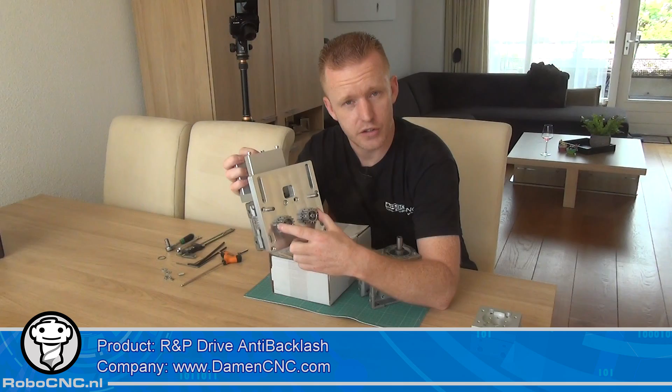To do this, we're going to use a product from Damen CNC. This is the product altogether. Basically, we have two pinions, used to get all the backlash out of the rack and pinion system. We have a worm gear with a 1:10 reduction ratio. This is needed because the rotational speed of a stepper motor is quite high, so we need to reduce it to get a smooth, normal speed on the CNC machine. And of course, on top we can mount our stepper motor.

I want to show you this unit. We're going to build one right now, and afterwards we're going to test it, of course. I think the testing won't be in this video, but this is an assembly video. Hope you guys like it.

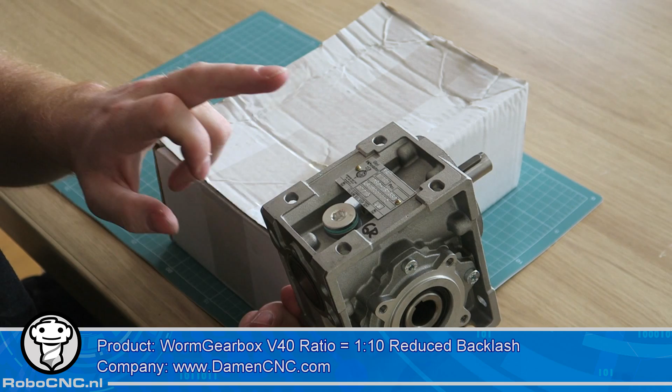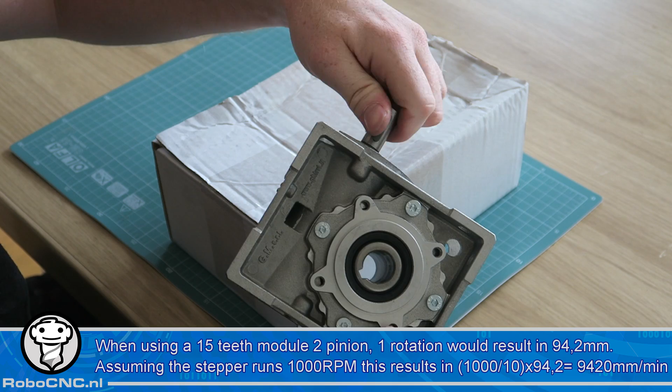Let's dive into it. In the package, first of all, we have the worm gear. You can choose which type you want; I've chosen the standard 1:10 ratio. Basically it's a 90-degree bend with a worm gear inside, and it's anti-backlash, so it should have really low backlash on the worm gear.

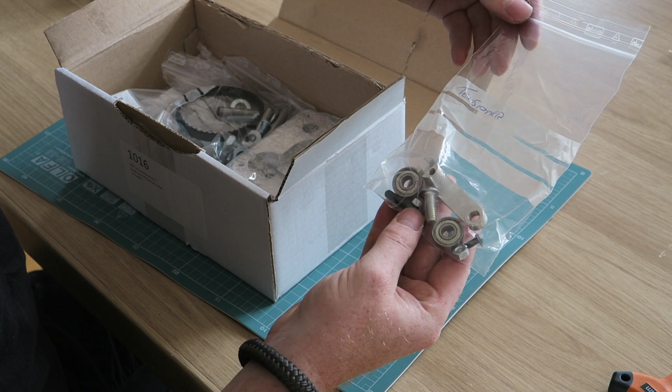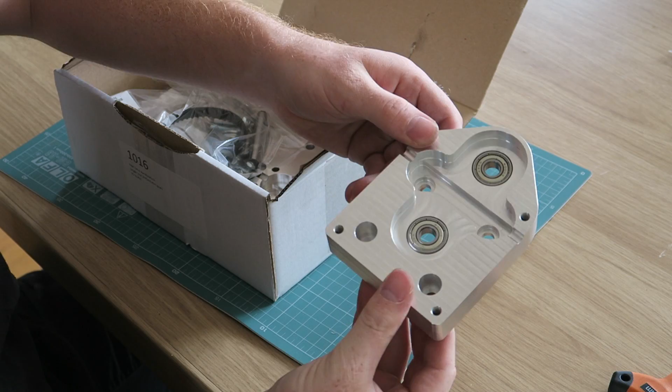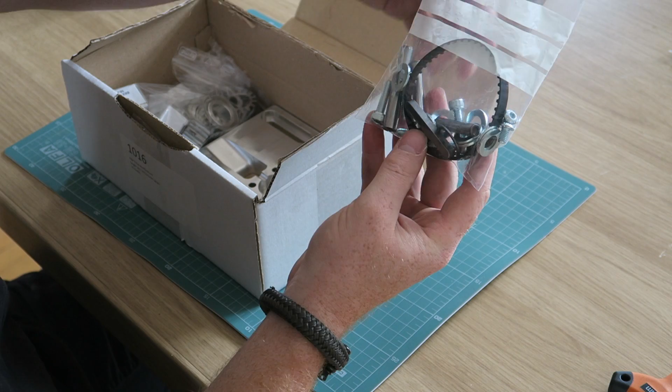Well, let's open up the package. We have a sensor inside, some paperwork, a nice set of bolts, a tensioner, or all the parts needed for the belt tensioner, some beautifully machined parts with the bearings already in there, a belt, some washers and straight pins, a shaft, and all kinds of goodies.

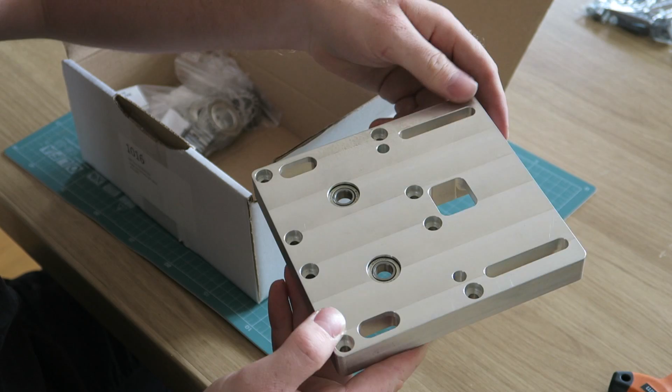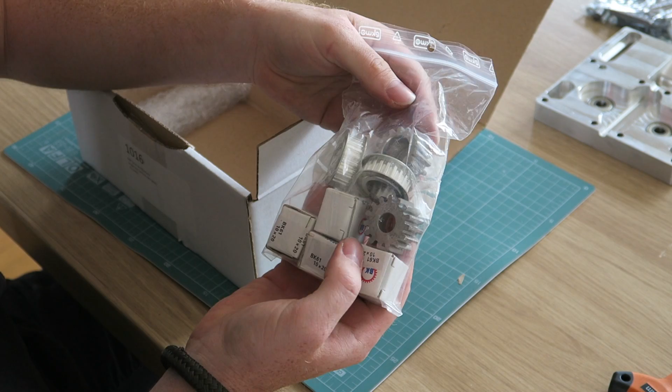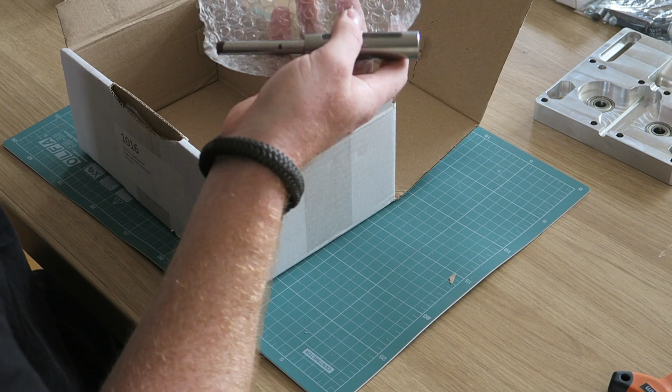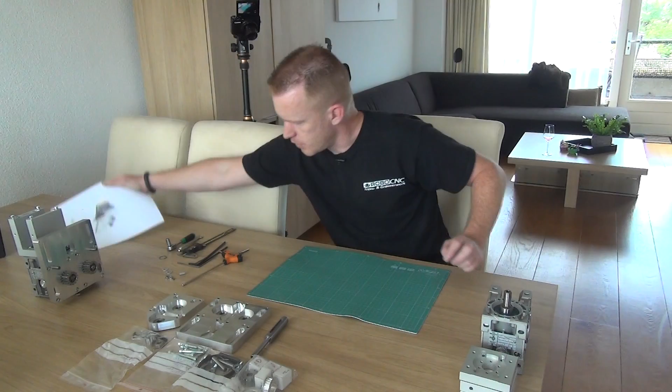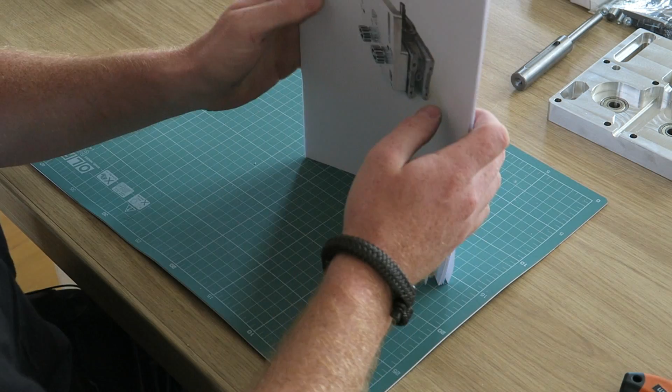So on the Damen CNC website, there's a manual for assembly of this unit, but you of course have this video, so maybe you don't need it. First of all, let's find step 1: an introduction and the tools required.

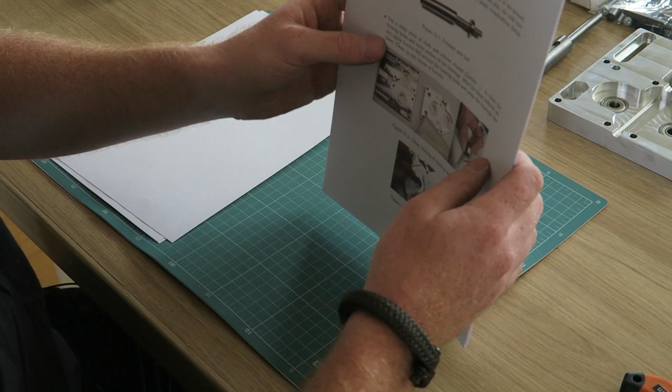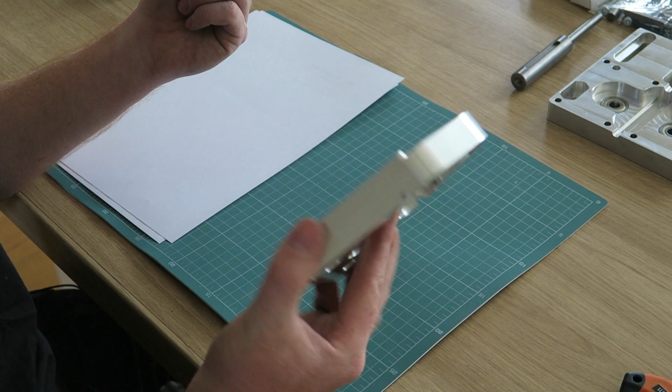Some Allen keys, wrenches, etc. There's an instruction for the bearings, to place them and glue them in place with Loctite, but it seems the unit already comes with the bearings in place, so we don't need that one.

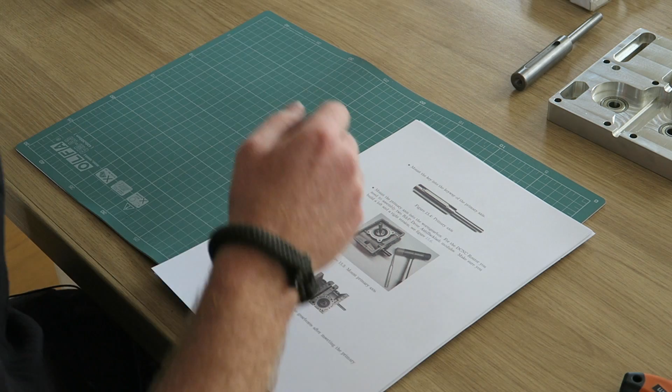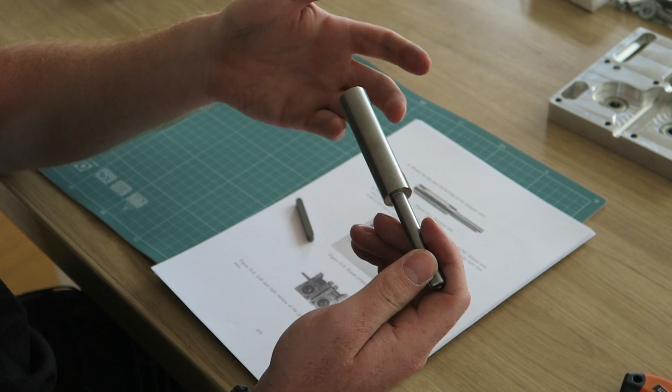Next step: mounting the key in the primary axis. I've taken this down to the workshop and used some Scotch-Brite and WD-40 to clean it up. If you have flash rust on it, it's easy to get off, and if you don't have flash rust, you also need to go to the workshop because you need to get the grease off. Anyway, make sure it's clean and put the key in there.

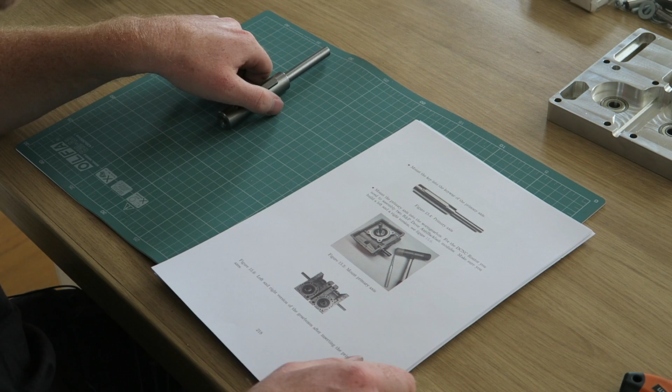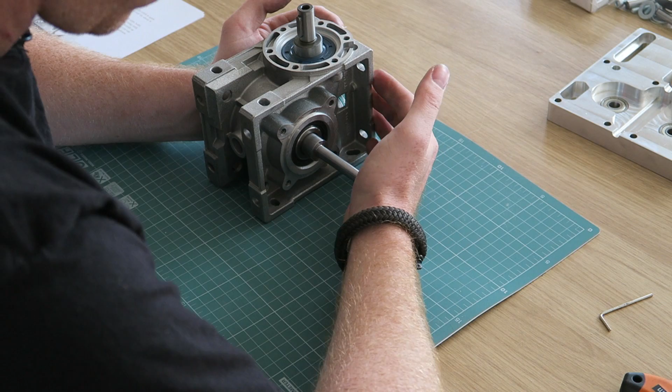So now we have the key inside of the shaft. We're going to place the shaft inside the worm gear, making sure we use a left unit and a right unit - on one it needs to be inserted like this, on the other like this. In my case, I'm going to place it like so. It's a nice fit.

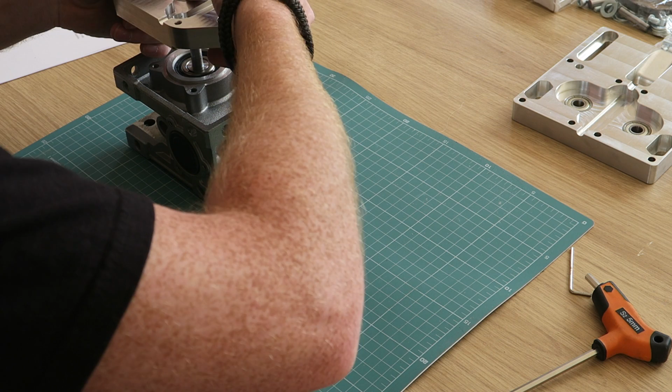So with the shaft now in the worm gear, it's time to mount the RP cover. It should slide over the primary axis in this way so that we have most of this material on top of the worm gear. So this would be the wrong way - this is the right way.

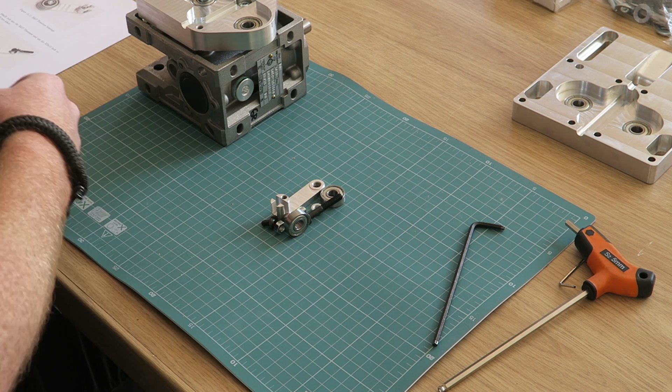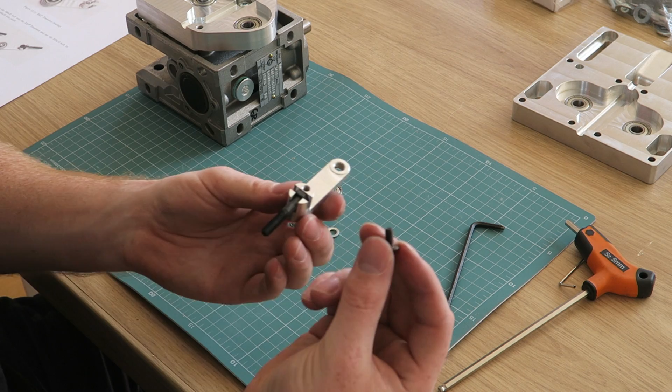Next up, the tensioner. The tensioner is going to be used to tension the timing belt inside this unit. So I'm gonna put this one like so. I'm gonna place this bolt in here.

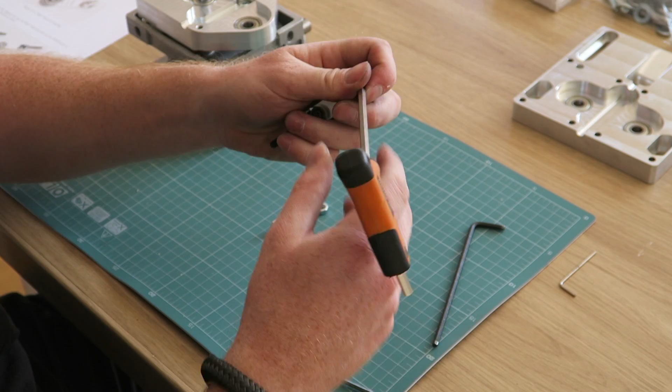The two bearings are going on this bolt and going to be mounted like so. There's a ring, nut, and a nut. Now we have, please focus, a tensioner like so.

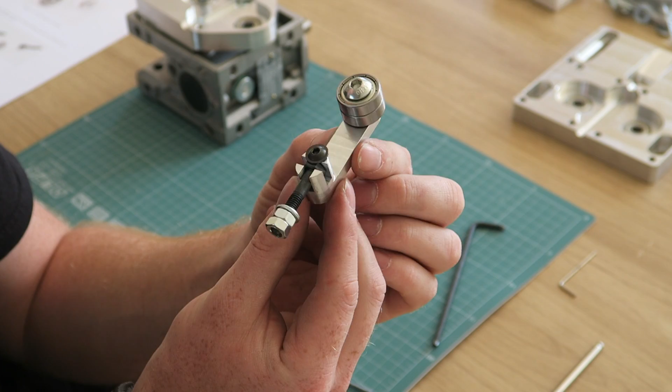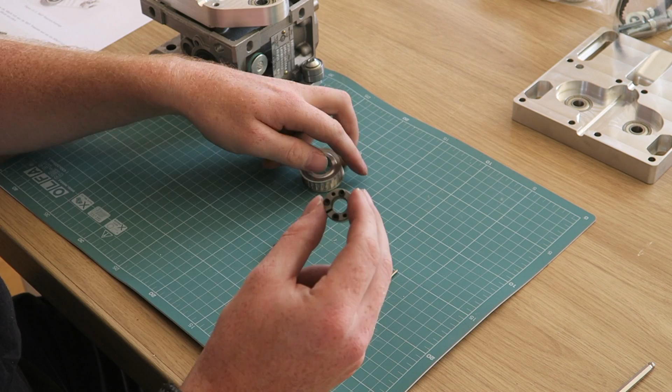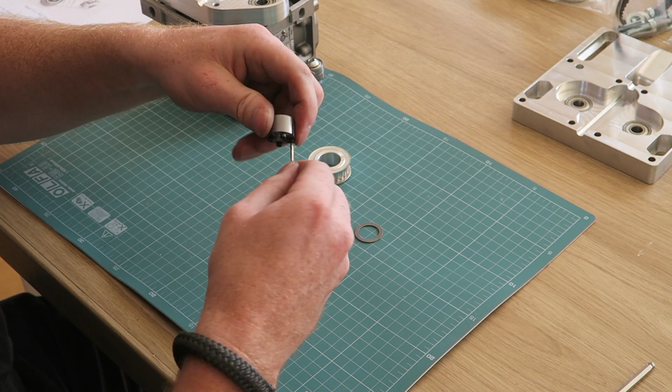The next thing to do is make the secondary shaft. We're gonna take one Tollok, and this Tollok is used to clamp this gear pulley on this shaft. So I'm gonna loosen up these bolts so that I can slide this on the shaft. Like so.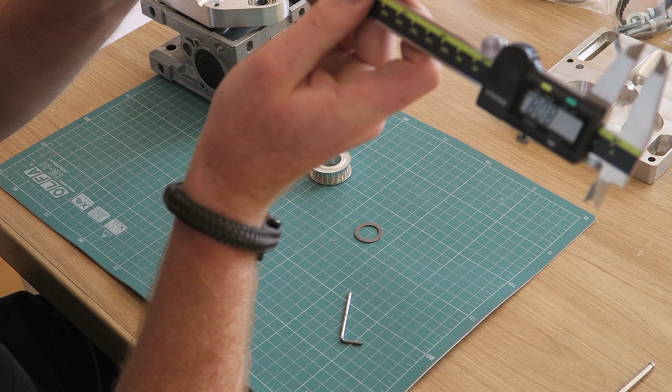Now I'm gonna take my calipers and set it to 8 millimeters, or close to 8 millimeters is fine. I'm gonna make sure the Tollok is about 8 millimeters from this end. So from here to here we have measured 8 millimeters.

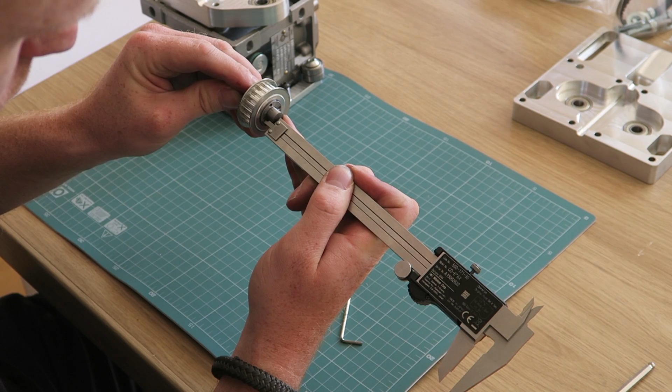Now it's time to put the gear pulley on it. I'll do it from this side. Okay, so now I moved it. Not a big problem, gonna measure it again. Eight millimeters.

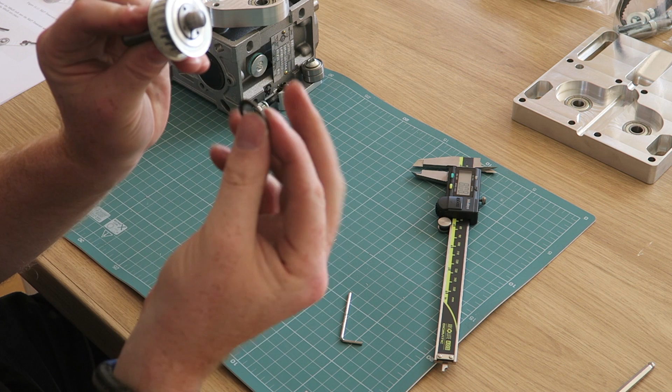There's this shim ring inside the kit. I'm not sure what they used it for, but I talked to Kevin, and we do not need it for this assembly. But what I use it for now is to measure a small distance. So the Tollok should be sticking out of the pulley the same distance as the thickness of this ring, which is about 1 millimeter.

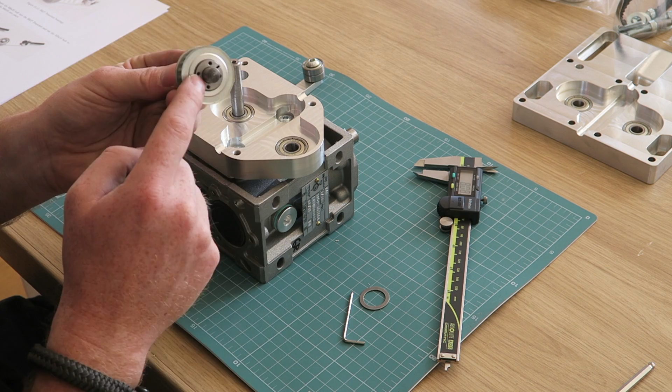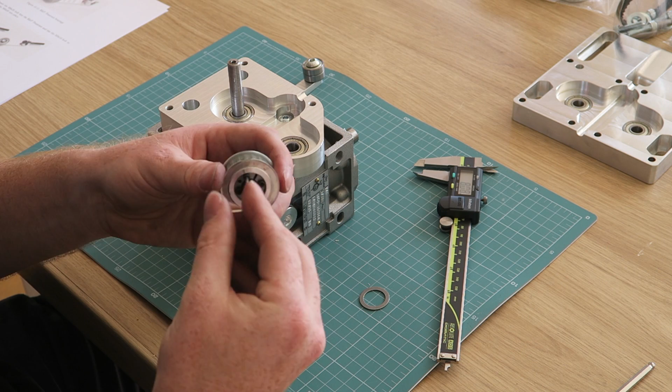And the reason I do that is that this will be placed on top of this bearing, and I only want the Tollok to touch the bearing and not the pulley, because this would rub against the aluminum, and we don't want that. Simple as that. So from the Tollok to the bottom it's 8 millimeters, and from the Tollok to the pulley it's about 1. Now it's time to fasten the bolts, of course in a crosswise motion.

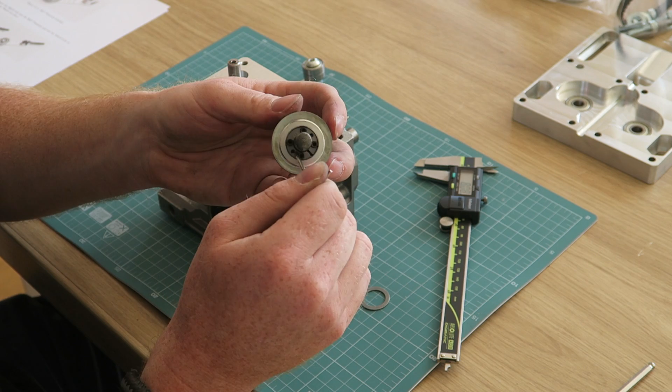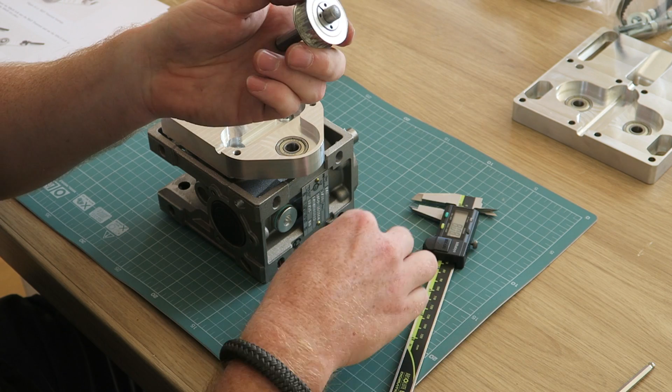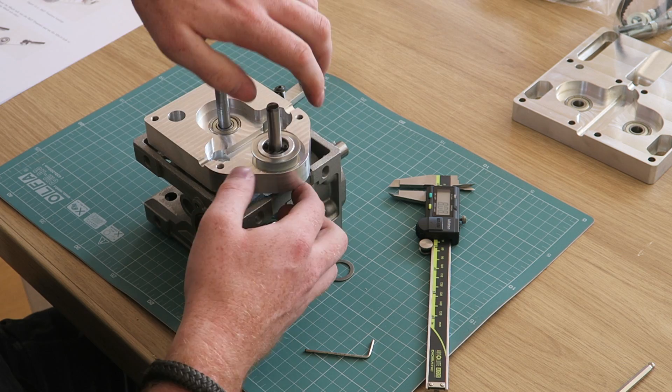So check it again. And it's great. Now I put the secondary shaft in its final position and check it spins freely, which it does. So now the secondary shaft is in place in its final position.

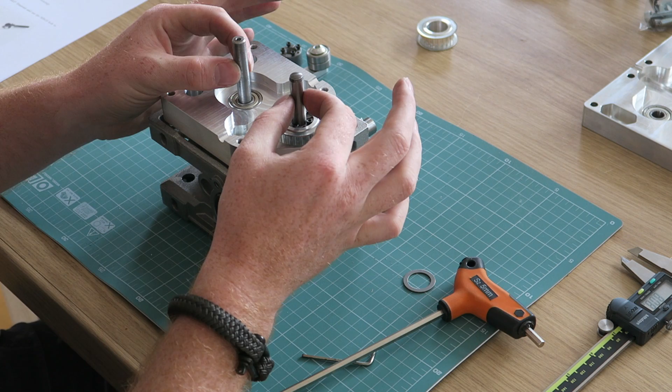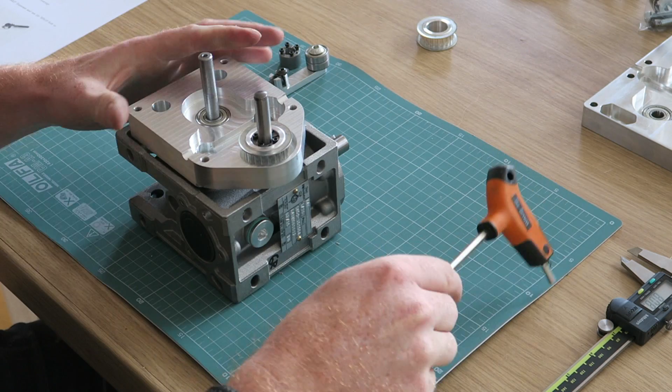Now we need to make sure that the primary shaft is at the same height as the secondary shaft. The primary shaft can still slide up and down like so. So check if they are about the same height, just by eye. And if they are at the same height, you're okay.

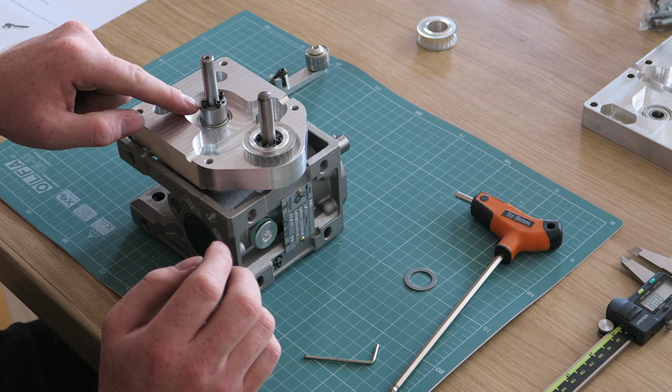So time to slide on the Tollok on the primary shaft, making sure that you do not slide the primary shaft anymore. The Tollok is sitting on top of the inner race of this bearing, so the Tollok can spin freely without touching the rest of the bearing. So this is the situation we want.

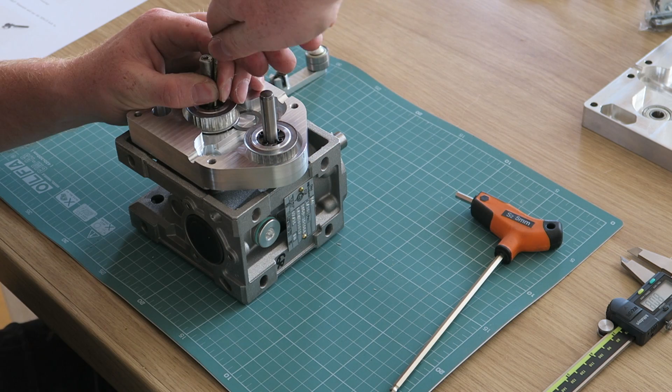Now we're going to use this spacer again, lay it down here at the bottom of the aluminum, and put in the timing pulley. The reason we do this is to make sure that this pulley and this pulley are at the same level, which is important, of course. Tighten the Tollok. And don't forget to take the shim out. So that's that.

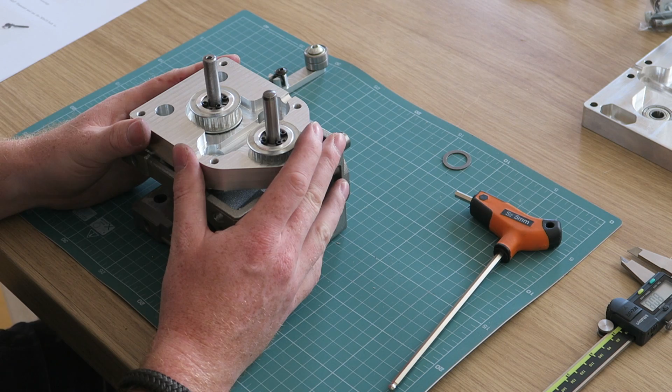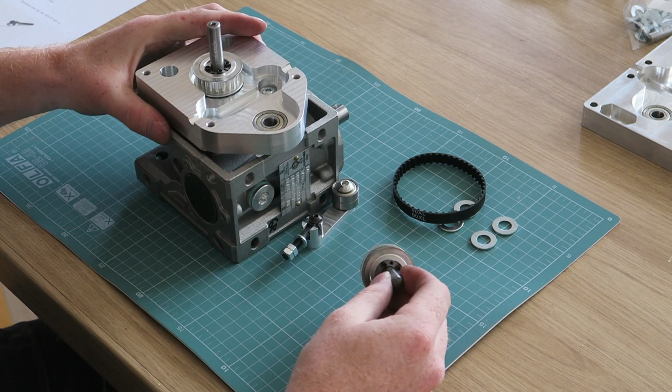In the next step, we're going to place the toothed belt, which is 90 XL. But to do so, we're going to remove the secondary shaft by pulling it out straight. Now we can place the tensioner inside the cover with the ring and the two nuts on the outside so it can slide freely.

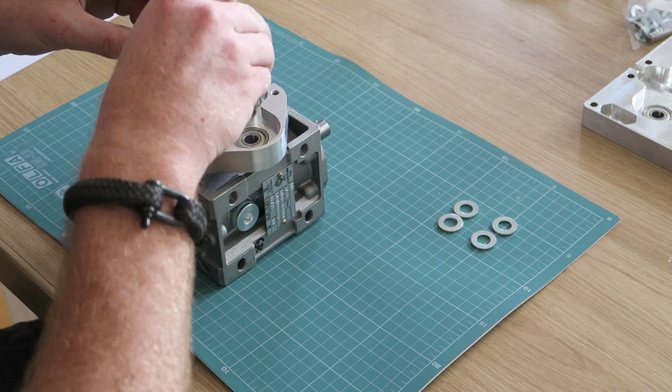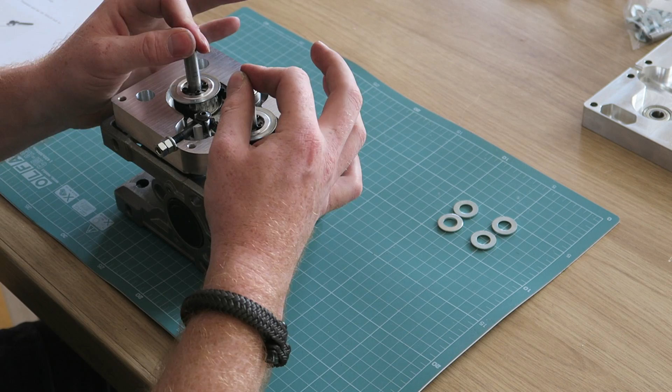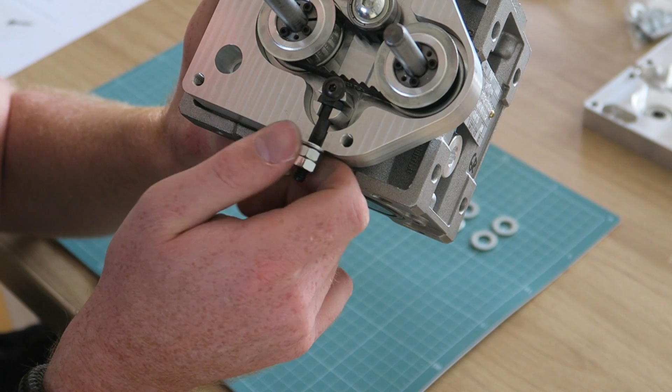Taking the belt, putting it on the two pulleys, making sure the tensioner is loose, place the secondary shaft back in its final position. So it looks like this. And as you can see, this will eventually be used as a belt tensioner. Oh, I need to do like so. This will be used as a belt tensioner later on. But I'm gonna put it like this.

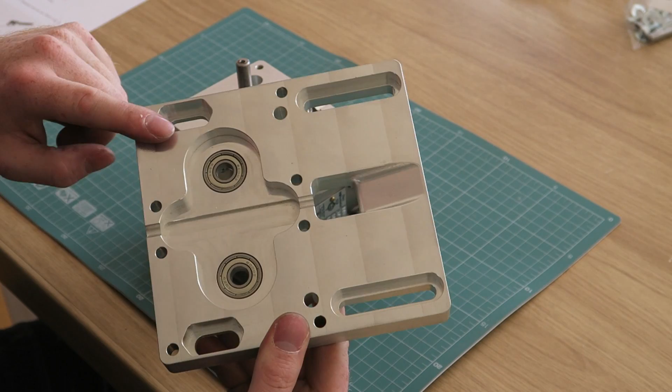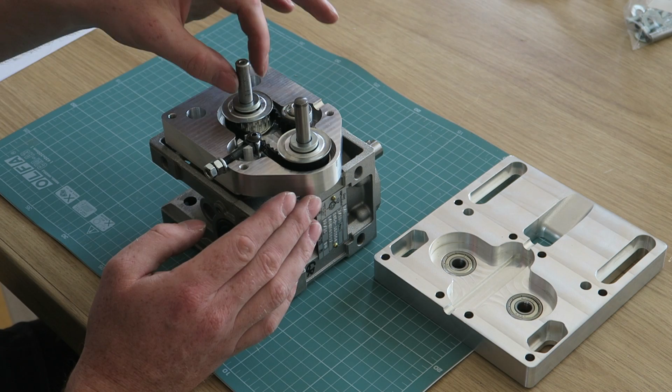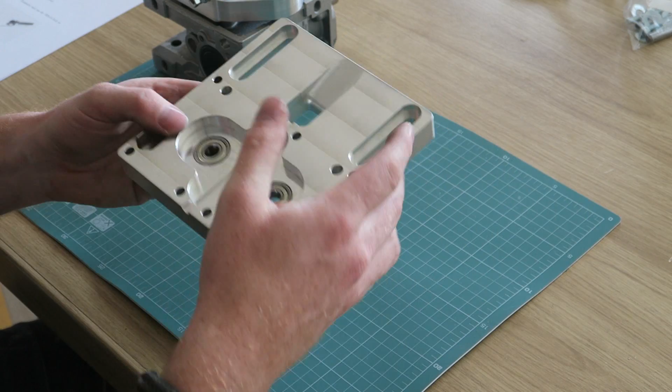So, on top of each shaft, the instruction manual says to put one of these rings. But I've been measuring the distance and the play in the shafts, and I found that if you follow these steps, it's precisely 2 of these rings before you put on this cover. So place the 2 rings, or measure it for yourself and choose appropriate rings to get about 1/10 of a millimeter play, just a little bit of play, but not too much. Okay, let's put this aside and work on this cover for a while.

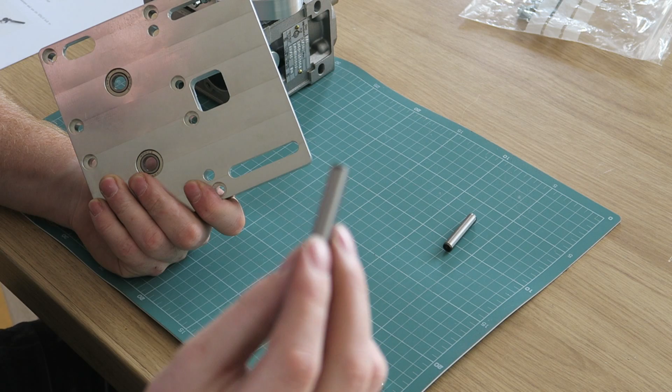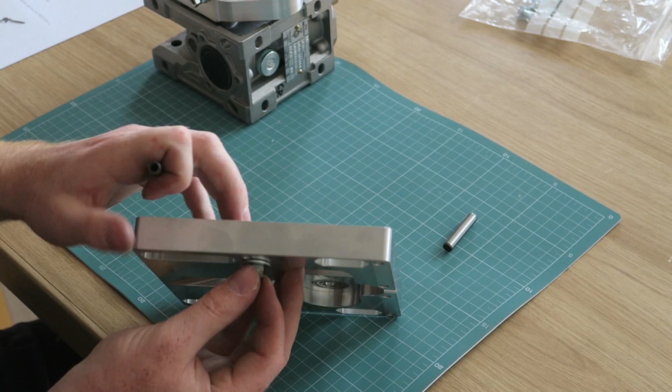In the kit are provided 2 of these straight pins. These pins will later be used to align the rack and pinion to the CNC machine or to the rack. We need to put these pins in, but it's a real tight fit. Luckily they are threaded on one side, so I can take a bolt, put on some nuts and a ring, like so. And now I can tighten the bolt, which pulls in this pin.

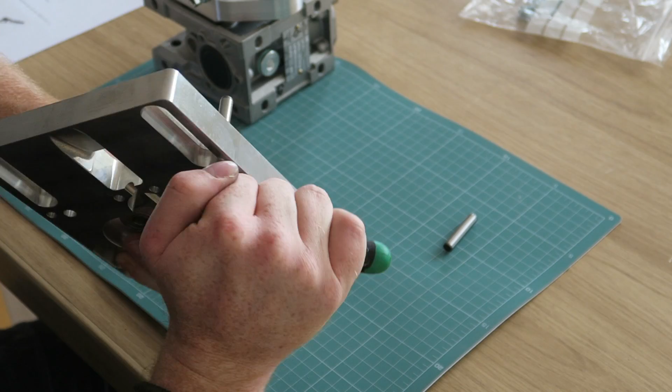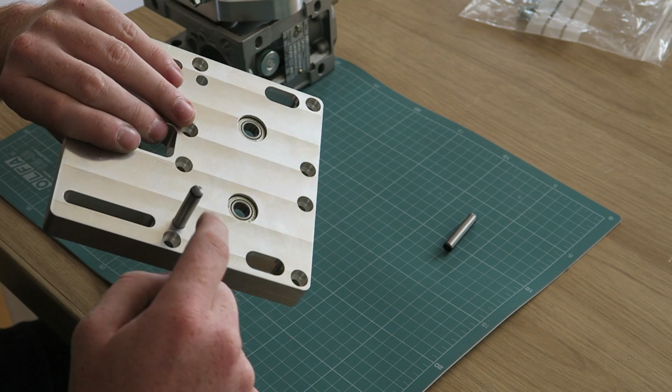It only has a short thread, so I have to place some more nuts on here and repeat these steps, or just take a hammer and try to tap it in. But make sure you start it like this, because you want it to be straight in the hole, after which you can use a hammer to tap it in. I'm gonna do this off camera, so stay with me. I'll be back with the pins in place.

So the pins are in, just some light persuasion and of course military precision, but they're in and they're not sticking out on the inside, which is really important. And they are nicely straight and square with this piece. So time to put the cover on. Should slide on these shafts quite easily, or at least I hope.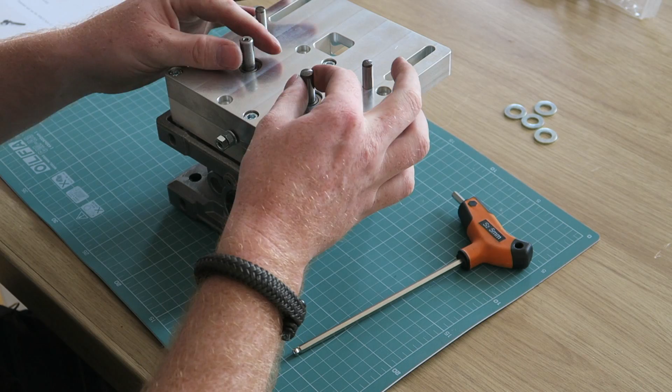Take the bolts. And still no friction, so the two rings are great, and I can... minor play in the axial direction. It's really almost none, so that's really what we were looking for. So it's starting to look like something.

Last step in this step is to put the remaining 4 washers, 2 on each shaft, which provides some clearance for the pinions to go on, which will be the next step. Next are the pinions to go on to the shafts. So we have 2 pinions with a large opening for the tallock. So we're gonna place the tallock inside, like so.

Et voila. And we're going to make sure that the tallock is really loose, and then place it on the shaft. May even be somewhat more loose. So they can both spin freely on its shaft or on its tallock, doesn't matter. Now we're going to make sure that at the bottom here the tensioner is loose. These are loose.

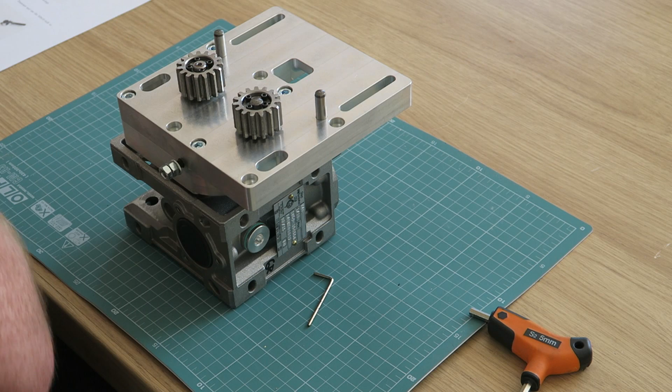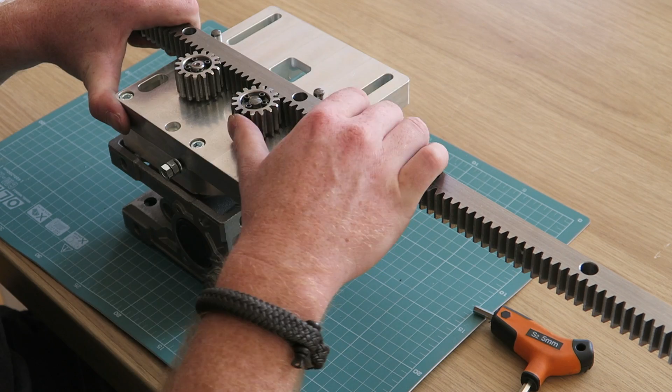Now we're going to align them. And we're going to align them with a piece of rack. So this way we know that with a loose bolt the tallocks and the pinions are straight in line with the rack, and now we can tighten the bolts of the tallocks.

So basically we're done. As you can see, these pins are going to be used with feeler gauges and this rack to align the correct distance for the pinions to go. And then you will have play on the pinions and the rack. And that's correct, because you should have play. Between the rack and the pinion should be play. It's not a good thing to use a spring and tighten them together. That's not how gears work.

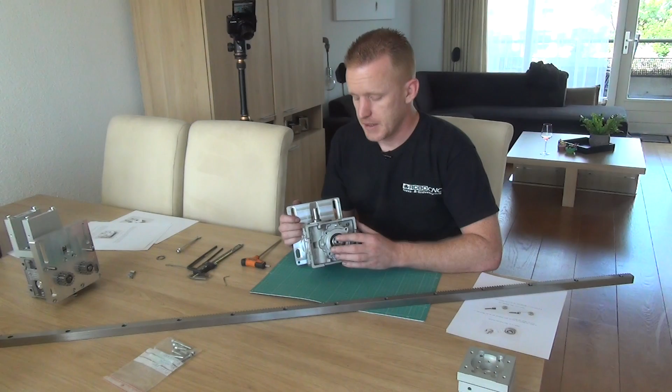Still, there might be some backlash eventually in this worm gear, because worm gears do have a little bit of backlash, although I've tried to measure it now without any load on it, and it's really 0. I talked to Kevin from Damen CNC about it, and when high forces are applied, it could have a little bit of radial backlash in the worm gear, but we're gonna test it out, and I think it's a great unit like so.

Still, we have a few more pieces left over, so I'm gonna mount these. This one, again, great machining, great finish.

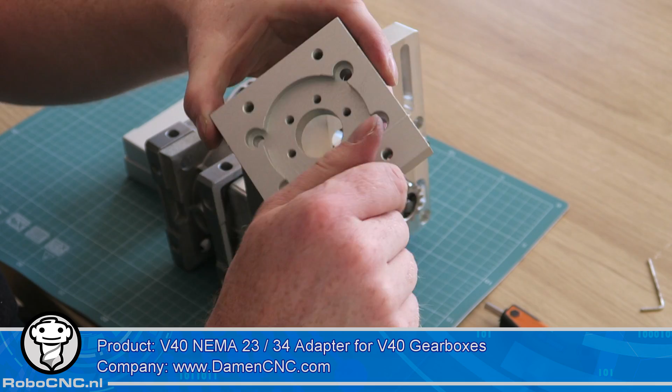What finish is this, Kevin? What do you use? What's your secret? Tell me. Okay.